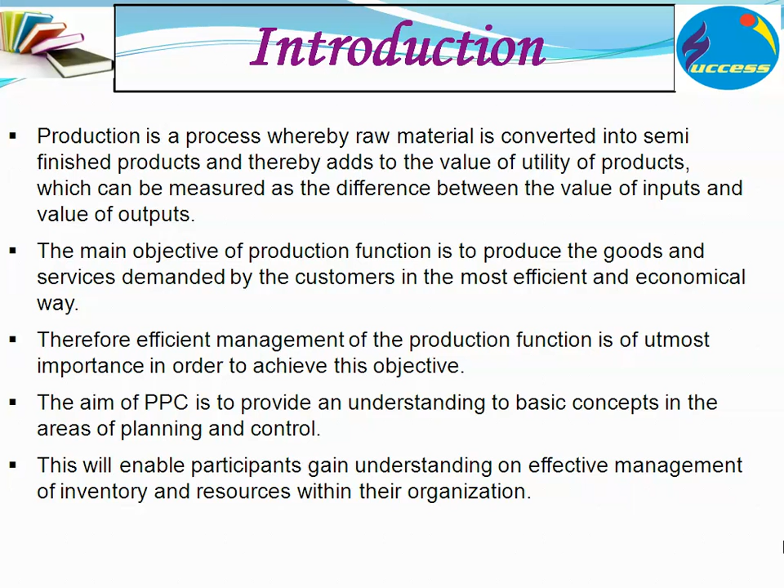The main objective of production function is to produce the goods and services demanded by the customer in the most efficient and economical way. The aim of production planning and control is to provide an understanding of the basic concepts in the area of production planning.

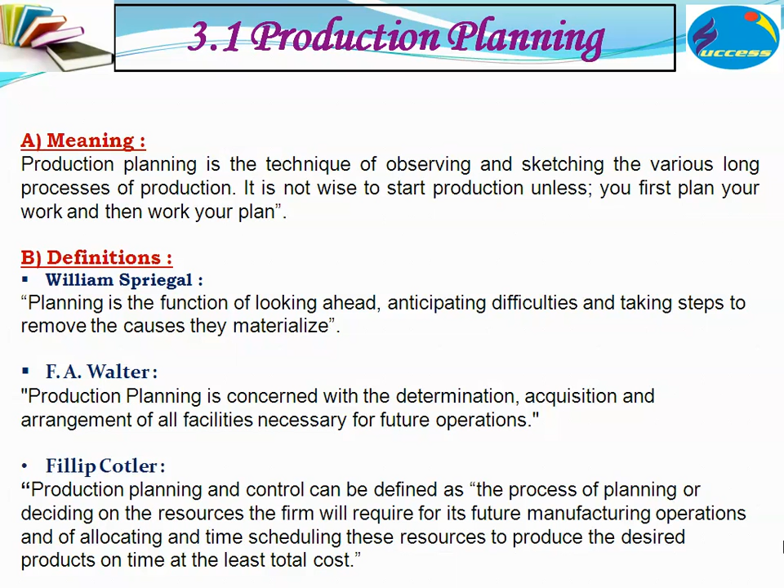According to William, planning is the function of looking ahead, anticipating various difficulties, and taking steps to remove the causes that materialize. Production planning is concerned with the determination, acquisition, and arrangement of all the facilities necessary for future operations or production. Now these are various objectives of production planning.

Production planning can be divided into two parts: first is production planning, and next is production control. Together it is called production planning and control.

The objective of production planning is to plan, to provide various resources, to inform the managers, to maintain the hierarchy of operations, to determine the capacity of production, to translate the orders into realities, to find ways and means so that smooth production is there, and to coordinate between the various departments.

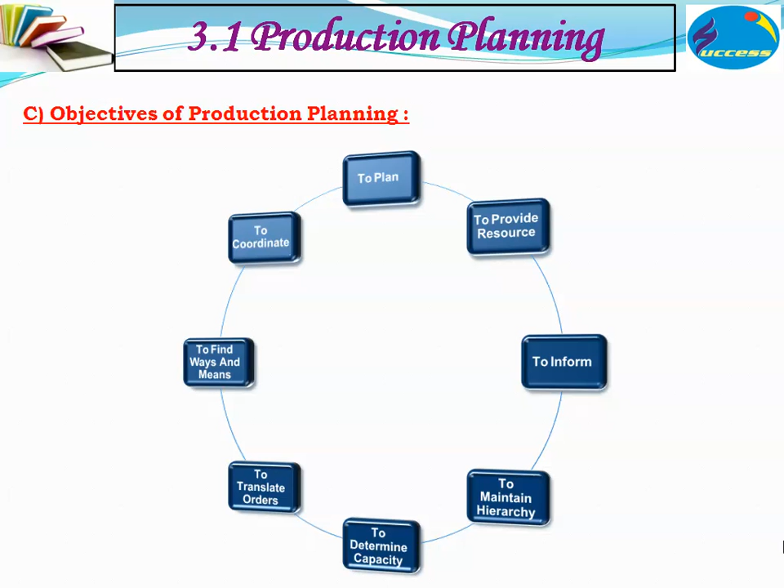The level of production planning. There are three levels: factory planning, process planning, and operation planning. At factory planning, the sequence of work tasks is planned in terms of building, machines, and equipment required for manufacturing the desired goods and services.

In process planning, operations are located and the sequence of operations in the production process is determined. Operations planning is concerned more with planning the details of methods required to perform each operation, namely selection of work centers and designing of tools required for various operations.

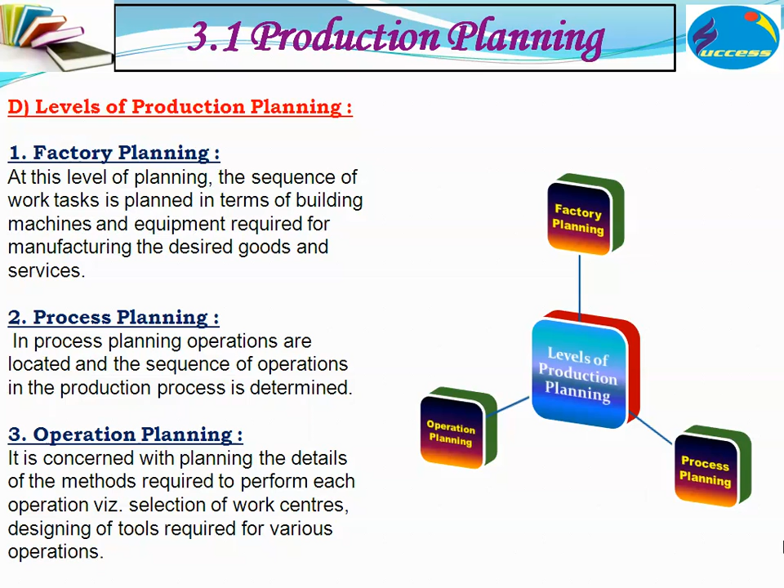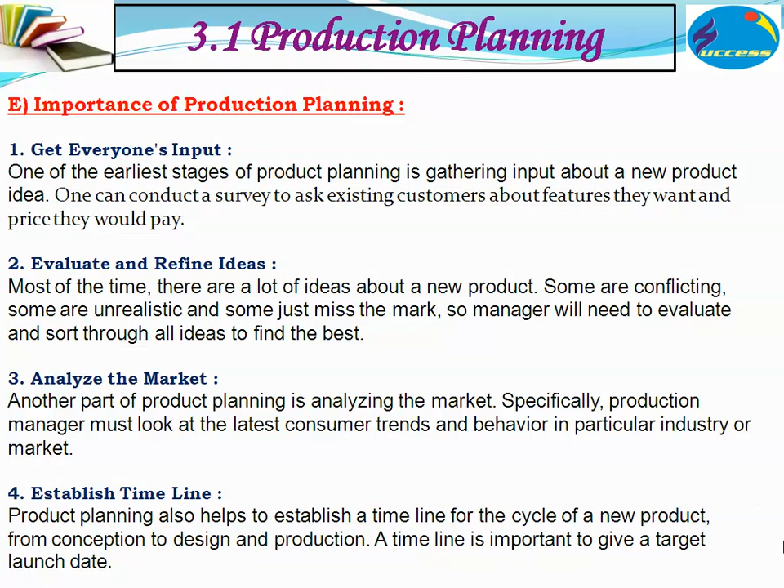Now, what is the importance of production planning? It gets everyone's inputs, it evaluates and refines various ideas from everyone in the department, it analyzes the market, and it establishes the timeline. What is the procedure of production planning?

First is determination of the targets. Set the target for production for the planning period, keeping in mind past experiences, production capacity, production facilities such as building, plants and equipment, manpower, etc.

Next is collection and interpretation of information: collection of data regarding available raw materials, machineries and equipment, capital market characteristics, etc.

Next is developing plans. Various production plans are developed, such as production policies, programs, budgets, sales budgets, etc. Then putting plans into operation: necessary instructions are issued to the concerned foremen and executives to convert plans into the final production.

And last is follow-up actions. The results are collected at the end and the execution plans may be analyzed and compared with the past records. So what is the procedure of production planning?

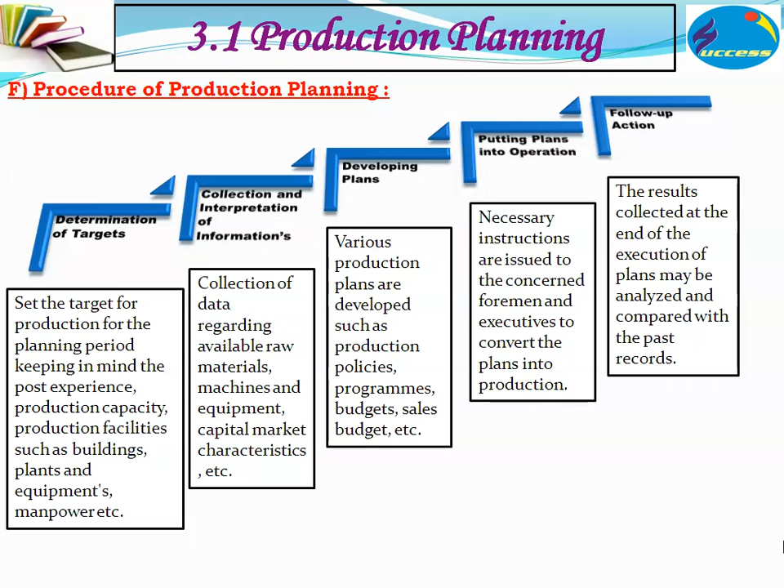First of all, you have to determine the target, then collect the information, develop the plan, put the plan into operations, and then take follow-ups.

Now, one concept is APP, that is Aggregate Production Planning. Aggregate planning is that particular plan that involves the production process. This operation activities must be presented to the management in order to inform them about what resources and what materials are engaged. Aggregate planning must have a time period of 2 months to 18 months before the production.

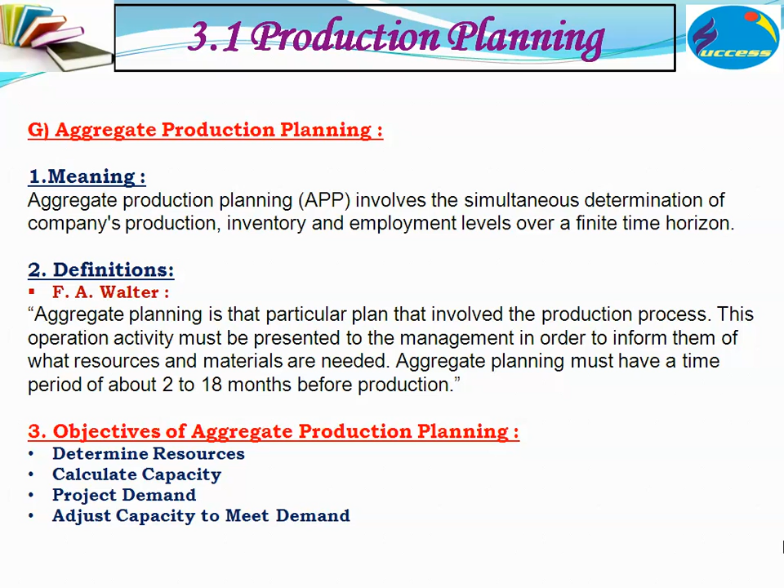The objectives are to determine the resources, to calculate the capacity, analyze the projected demand, and adjust capacity to meet the demand. The advantages of aggregate production planning: first is resource allocation is nicely done.

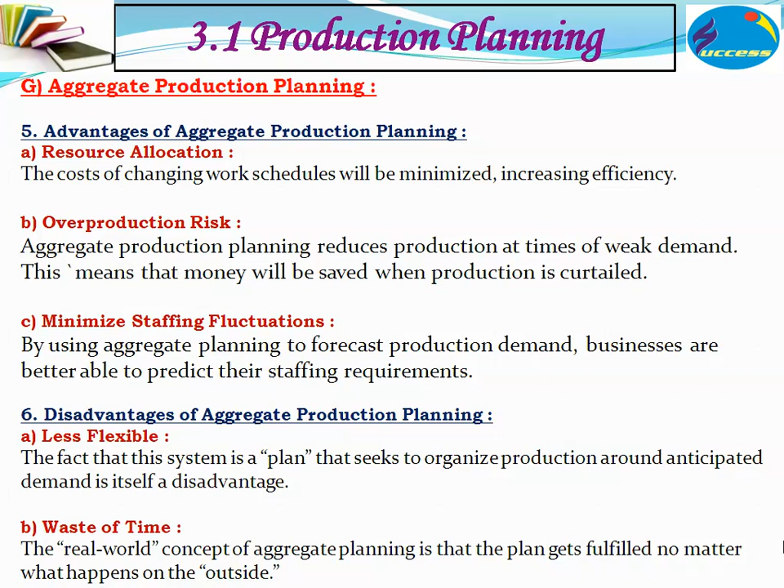There is less overproduction risk. It minimizes the staffing fluctuations. The disadvantages of aggregate production planning include it is less flexible and it is, in that way, a waste of time.

Alternatives for managing demand and supply. Now there are two alternatives. First is reservation of capacity. One method used to manage the demand is to moderate and shift the excess demand out of a busy period to the future period without completely losing it.

Influencing demand: another method to manage the demand is to influence the demand during a particular period through some mechanism and some induced customer involvement, shifting the demand to other periods when there is low demand.

Now, what are various alternatives for managing supply? We have seen alternatives for managing demand. Now we will see alternatives of managing supply. There are again two types: inventory based alternatives.

Matching the demand with the supply could be done in four ways using inventory. One is to build inventory during periods of lean demand and consume them during periods of high demand.

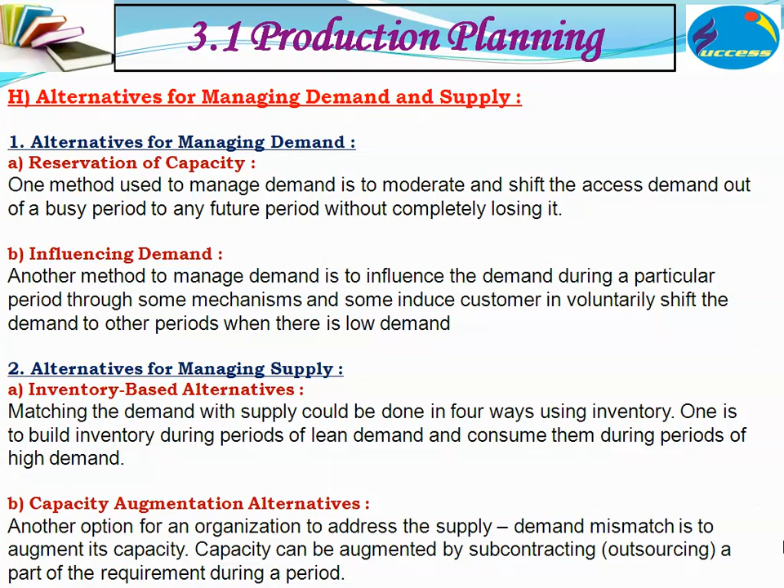Next is also capacity augmentation alternatives. Another option for an organization to address the supply-demand mismatch is to augment its capacity. Capacity can be augmented by subcontracting or outsourcing a part of the requirement during a period.

Next important concept is MPS, that is Master Production Schedule. It can be defined as the plan that a company develops for production, inventory, staffing, etc. It sets the quantity of each and every end item to be completed in each week of the planning horizon.

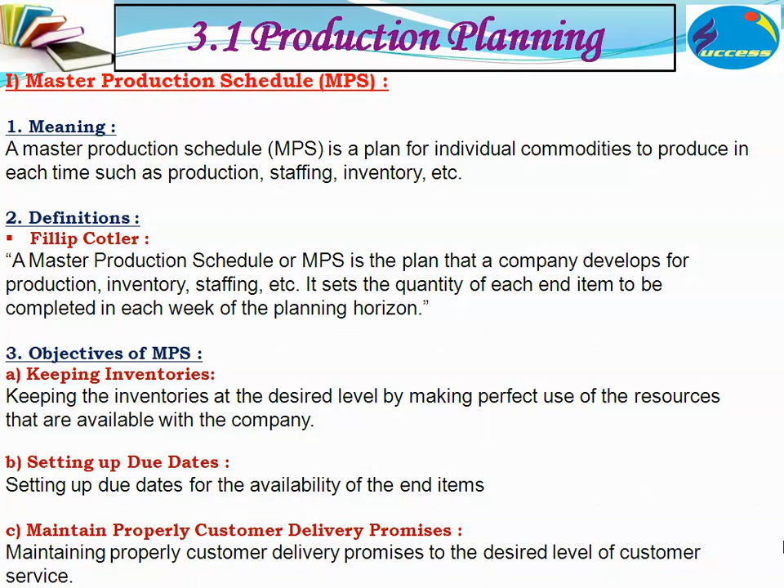The objectives of MPS, that is Master Production Schedule, are keeping the inventories intact, setting up the due dates, and maintaining properly customer delivery promises.

The function of MPS includes translating the aggregate plan, that is the aggregate production planning that we have done, into specific end items, evaluating the alternative schedules, and generating material requirement and capacity requirements.

The advantages of MPS: it helps to smooth the demand signal, it protects the lead times, and it helps future deliveries.

It acts as a single communication tool to the business. It helps supply chain prioritize requirements and helps to stabilize the production.

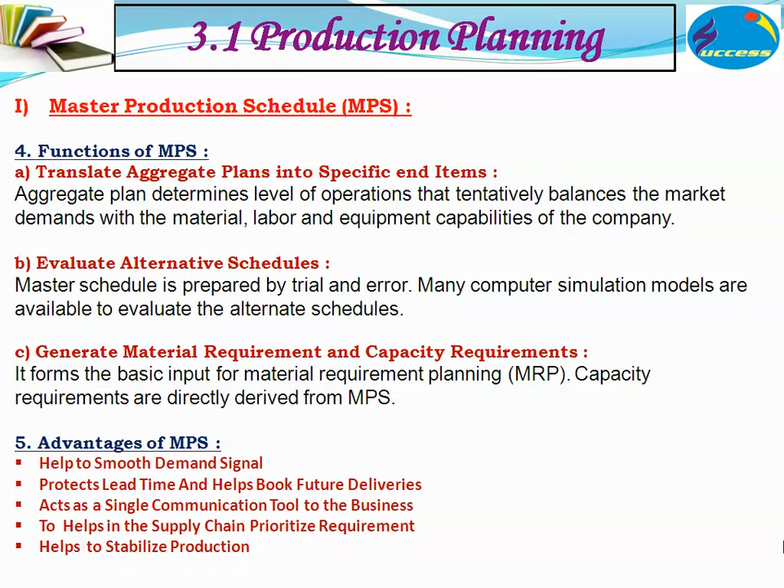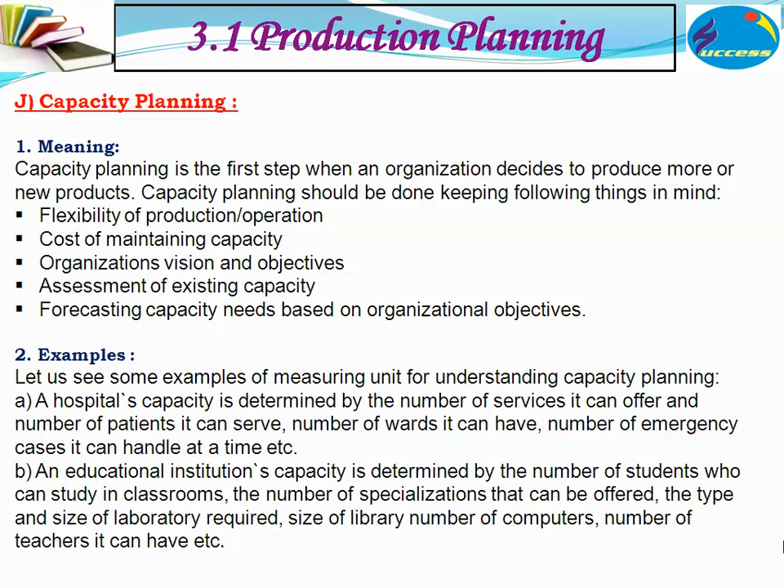Next concept is capacity planning. Capacity planning is the first step when the organization decides to produce more or new products. Capacity planning should be done keeping the following things in mind: flexibility of production or operation, cost of maintaining the capacity, organization's vision and objectives, assessment of existing capacity, and forecasting capacity needs based on the organization's objectives.

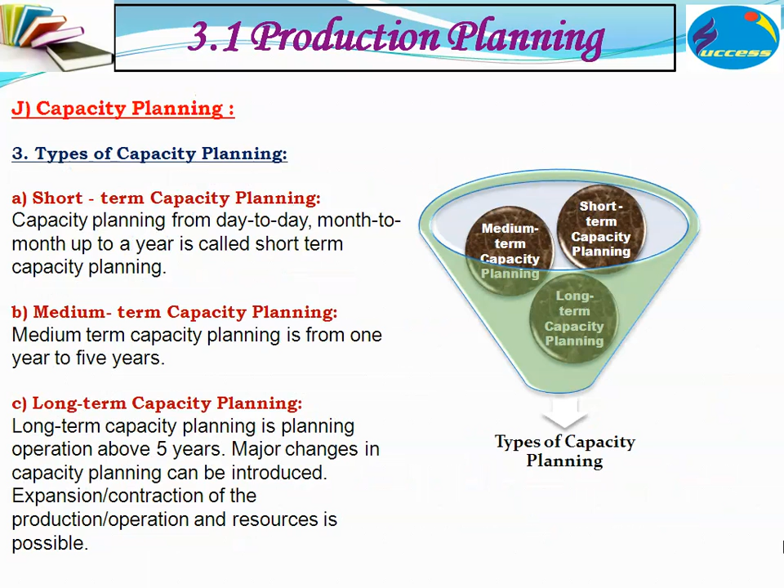There are three types of capacity planning: short term, medium term, and long term. Short term may be day to day, medium term may be 1 to 5 years, and if it is more than 5 years, then it is long term capacity planning.

Regarding capacity planning strategies, if you are designing a long term capacity planning strategy, there should be multiple products, phasing in capacity and phasing out capacity. These are the three strategies. For short term capacity strategies, you should take care of backlogs, which should not be there, and inventory should be maintained properly.

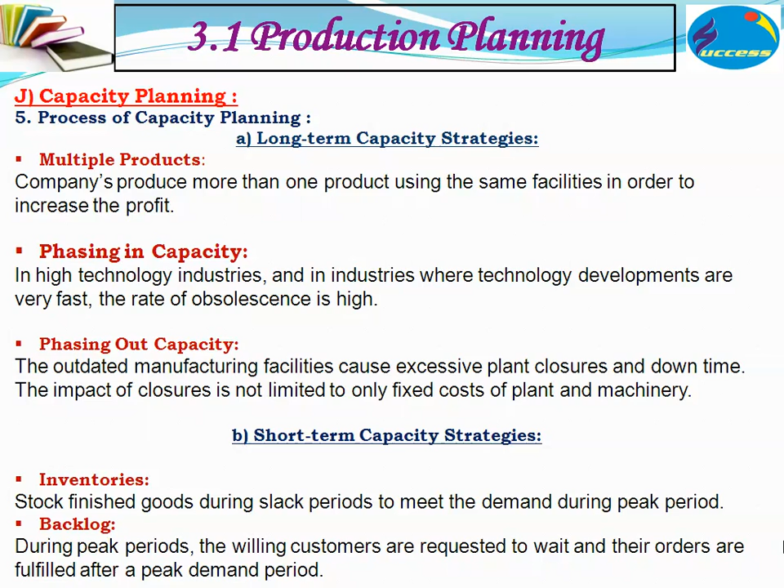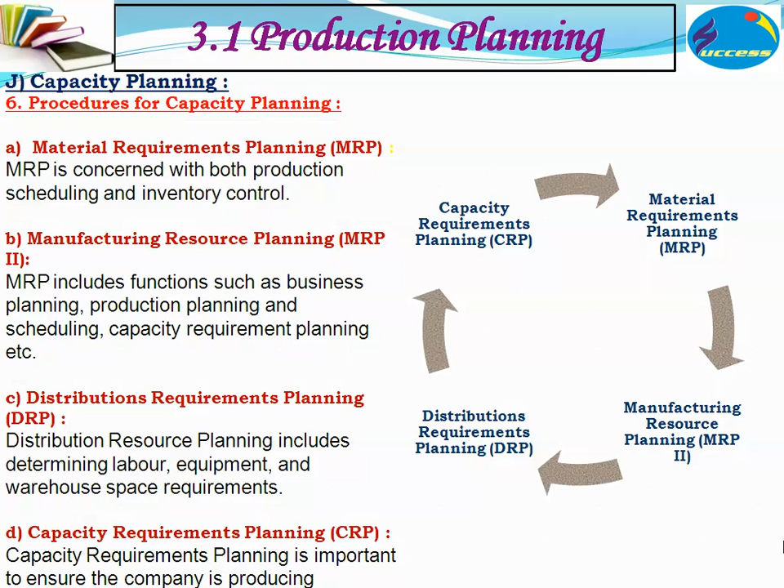Now, how to achieve this capacity planning? The procedure is like this: first, capacity requirement planning, that is CRP, is to be done. Then MRP, that is material requirement planning. Then MRP2, that is manufacturing resource planning. And finally, distribution requirement planning, that is DRP. These are the cycle of capacity planning.

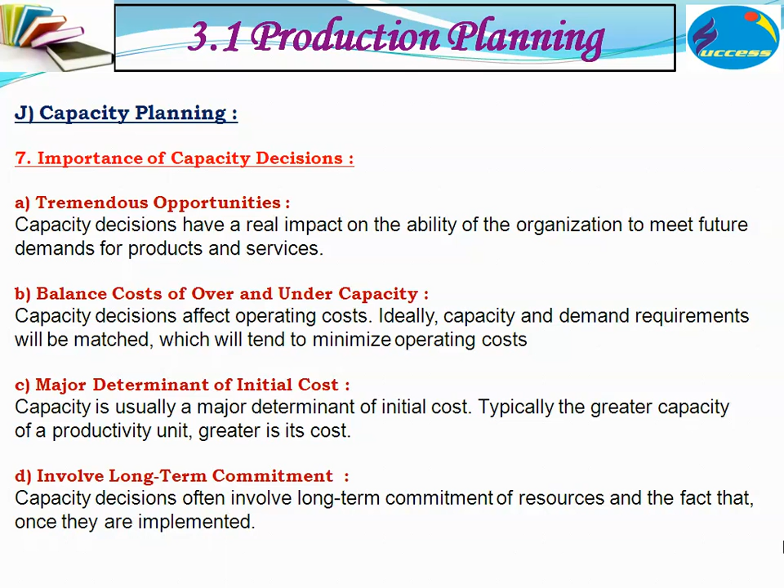Now, what are the importance of capacity decision? It has tremendous opportunities, balances cost of over and under capacity, is a major determinant of initial cost, and involves long-term commitment. We have seen what do you understand by production planning.

Next part is what do you understand by production control. Now you have done planning. According to planning, whether things are going or not, you have to monitor through the controlling part. So production control is the art and science of ensuring that all which occurs in accordance with the rules established and instructions issued.

Production control system contributes to the efficient operation in a plant. In terms of manufacturing customers' orders, production control ensures a more positive and accurate completion and delivery date.

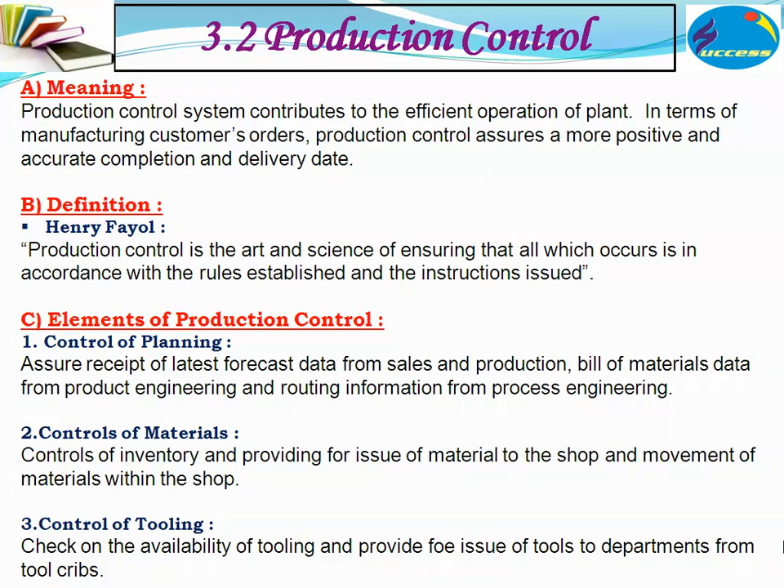There are three elements of production control: control of planning, control of material, and control of tooling. There are three factors that affect production control: nature of the production, nature of the operation, and magnitude of the operations.

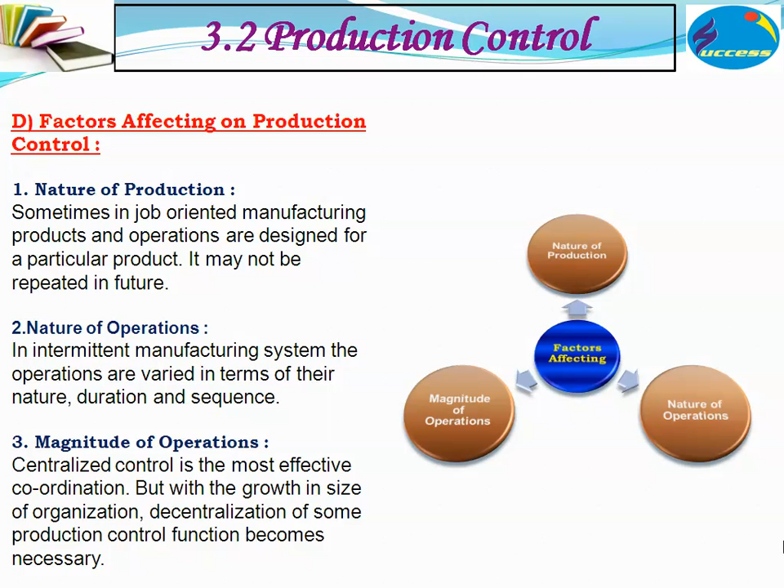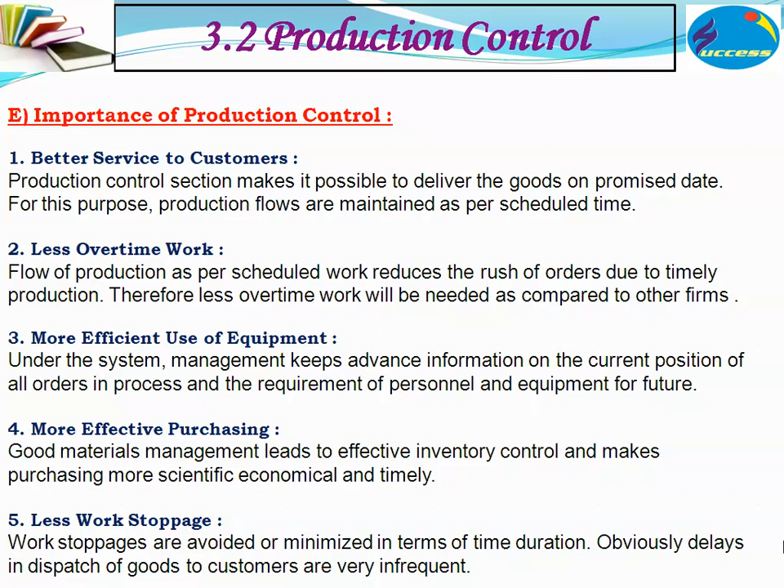Why study production control? For better service to the customer, less overtime work, more efficient use of equipment, more effective purchasing, and less work stoppage - that can be achieved with production control.

Next part is routing and loading. What do you understand by routing? Routing may be defined as the selection of path, that is route, or routes over which each piece, that is each product, is to travel and is being transformed from raw material into finished goods.

What is the process of routing? Analyze the product first. It is necessary to determine the purchase of materials and processes which are to be performed according to the planning. While determining the routes, the analysis of type of material is done. The processes and essential elements and their logical sequences are to be determined before routing is determined.

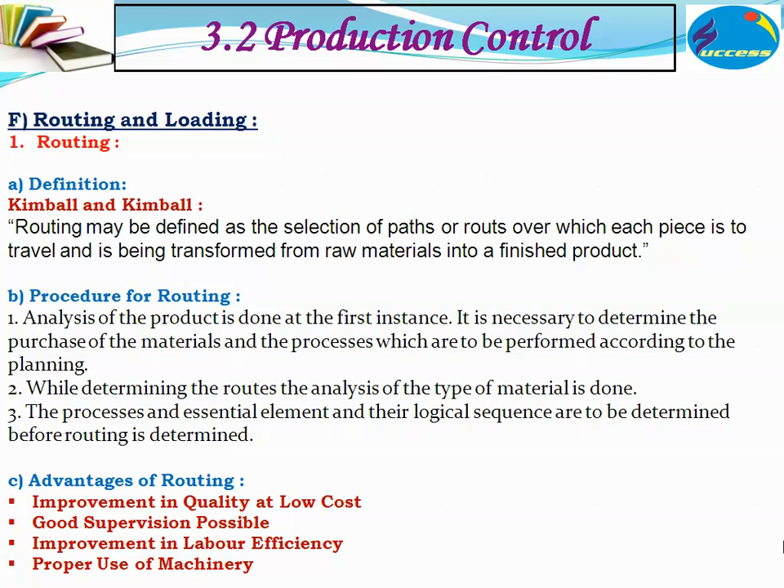What are various advantages of routing? Improvement in quality at low cost, good supervision possible, improvement in labor efficiency, and proper use of machineries can be achieved. Now, what is loading?

After establishment of the route, the next function is loading of work against the concerned machines and equipments. Loading deals with the amount of work assigned to a machine or worker. The person concerned with these loading functions must be up to date in keeping all the records of the workload and capacity of each machine and shop.

The total time required to complete the workload is computed by multiplying the unit operation time given to the standard process sheet by the number of parts planned for the workstation.

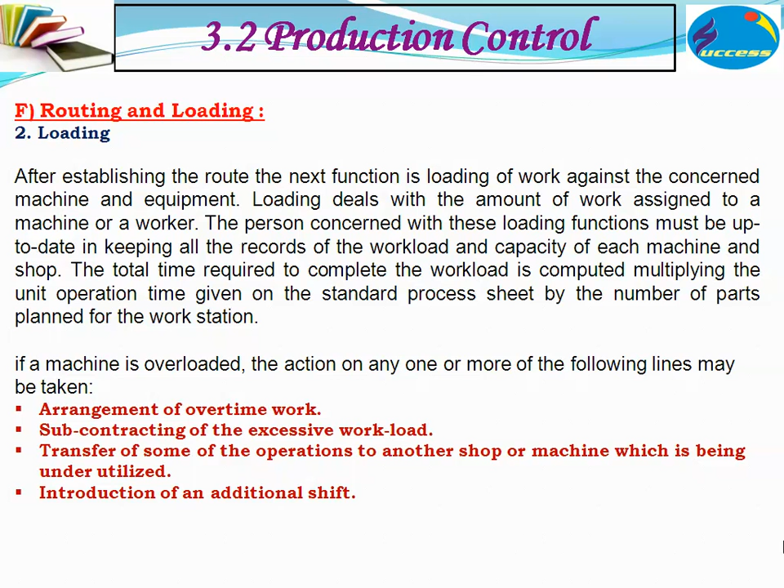If a machine is overloaded, action on any one or more of the following lines may be taken: arrangement of overtime work, subcontracting of the excessive workload, transfer of some operations to another shop or machine which is being underutilized, and introduction of additional shifts.

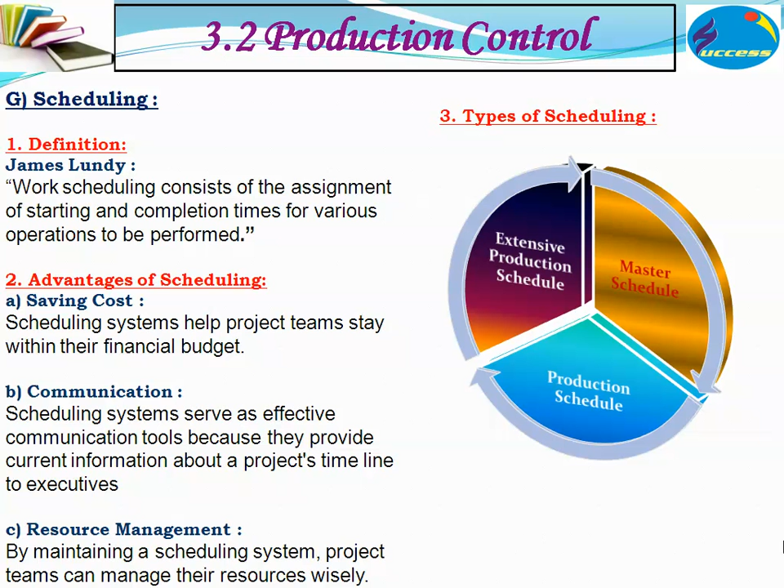We have seen loading, we have seen routing. Now next is scheduling. What is scheduling? Work scheduling consists of assignment of starting and completion times for various operations that are to be performed.

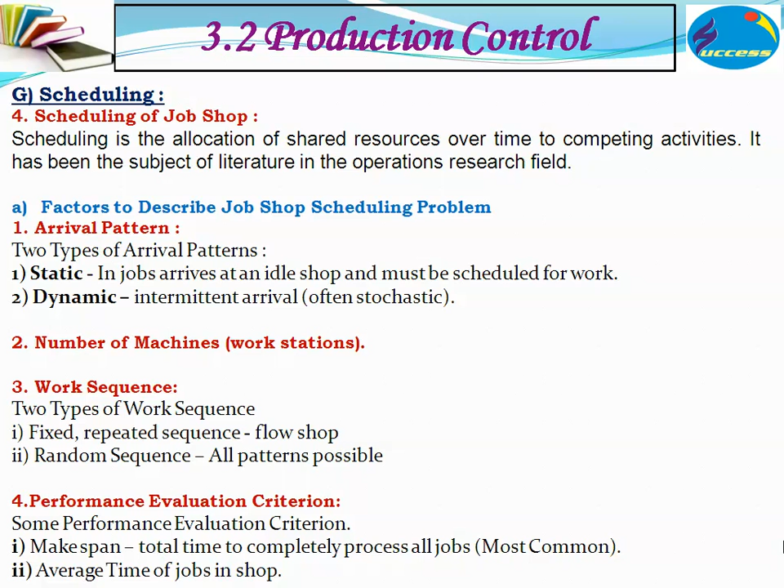Factors to describe the job shop scheduling problem: there are two types of patterns - static pattern and dynamic pattern. Static pattern: jobs arrive at an idle shop and must be scheduled for work. Dynamic means intermittent arrival.

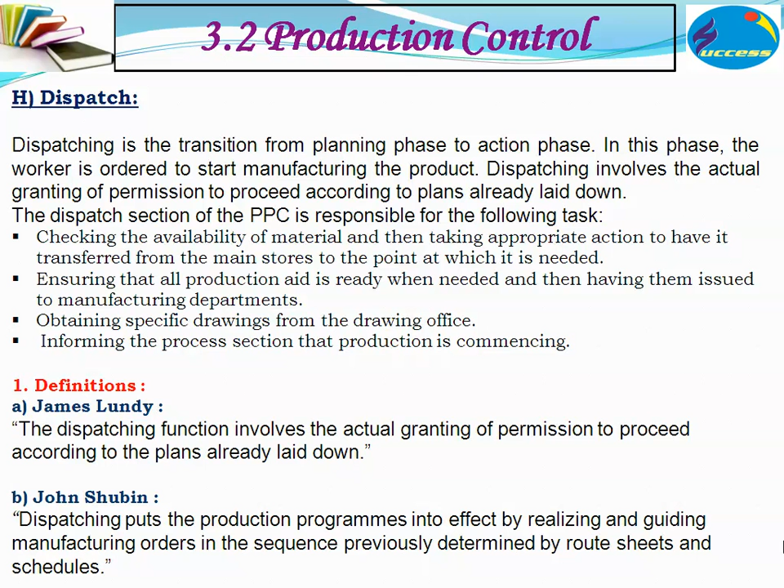Dispatching is simple. The dispatching function involves the actual granting of permission to proceed according to the plan already laid down. Type of dispatching can be centralized dispatching and decentralized dispatching.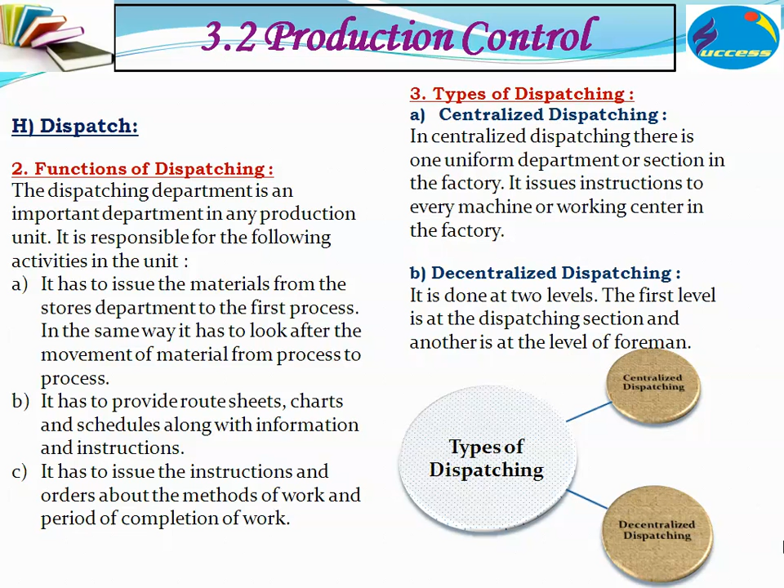In centralized dispatching, there is one uniform department or section in the factory. It issues instructions to each and every machine or working center in the factory. Decentralized dispatching is done in two levels: the first level is the dispatching section, and another level is the foreman.

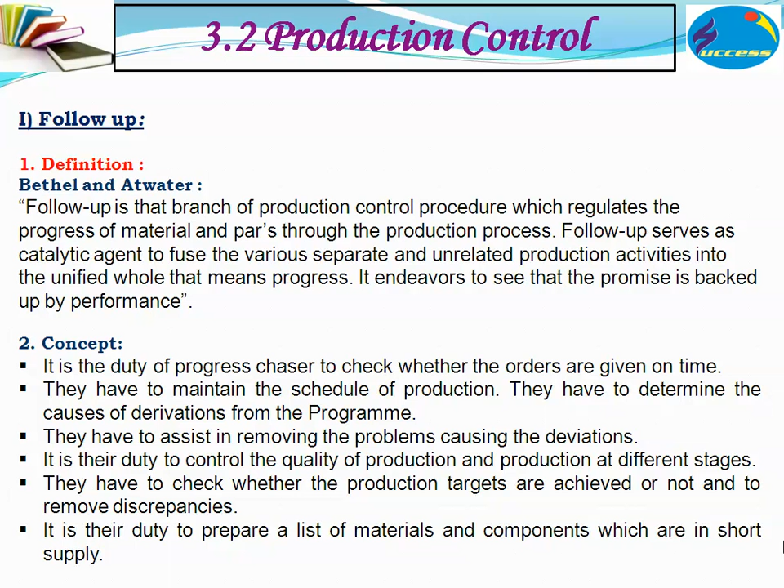Last part is follow-up. Follow-up is the branch of production control procedures which regulates the progress of material and parts through the production process. Follow-up serves as a catalytic agent to fuse the various separate, unrelated production activities into a unified whole, meaning progress. It endeavors to see what is promised is backed by performance.